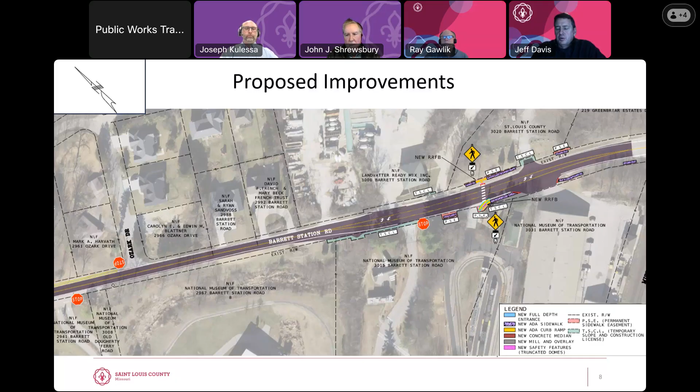The pavement resurfacing will then continue on the other side of the bridge in the eastern direction. Curb ramps will be installed at Trossock Lane to provide pedestrian access to the existing sidewalk.

As you can see from this slide, the pavement resurfacing continues east. The northern side will have drainage improvements. The existing head wall and crossroad culvert will be replaced to help resolve the drainage issues that have been reported by residents throughout this corridor.

The pavement resurfacing continues east, as well as drainage improvements. The approach to Barrett Crossing Court will be replaced due to poor conditions. The pavement resurfacing continues to Barrett Station Road and Big Bend Road, where signal improvements are proposed. The project resurfacing ends at Big Bend Road.

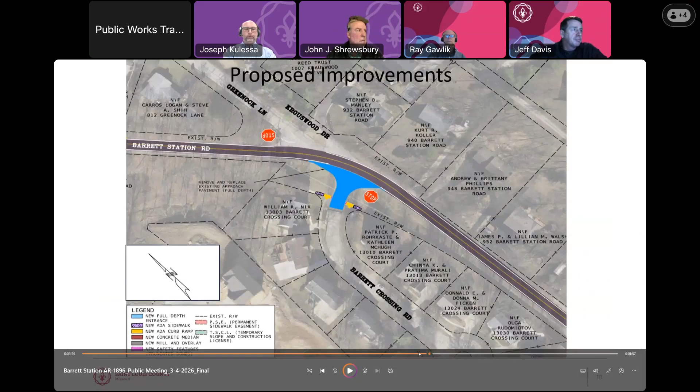John, I can speak to that if you'd like. Yes, please, certainly. I'm assuming you're talking about the turn there, kind of west of Ozark Drive towards Old Dougherty Ferry.

There's a known issue there with a power pole being very close to the edge of pavement. That's something our team's looking at, to see if we can potentially relocate it to a better spot so it doesn't get sideswiped. Also, we're planning wider outside pavement markings, like 6-inch wide pavement markings, just to make it easier to see where that pavement drop-off is. So those are two of the things we're doing on that turn.

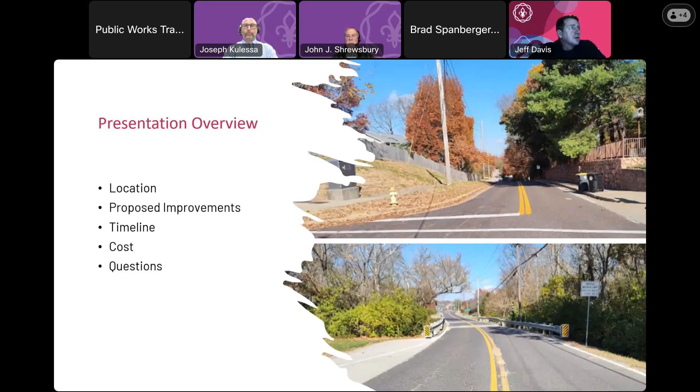Hello, and thank you for attending this meeting. We are happy to share information about St. Louis County's plans for improvements along Barrett Station Road. During this presentation, we will review the project location, the proposed improvements, project timeline, and the project budget. We will open the chat for questions after the presentation.

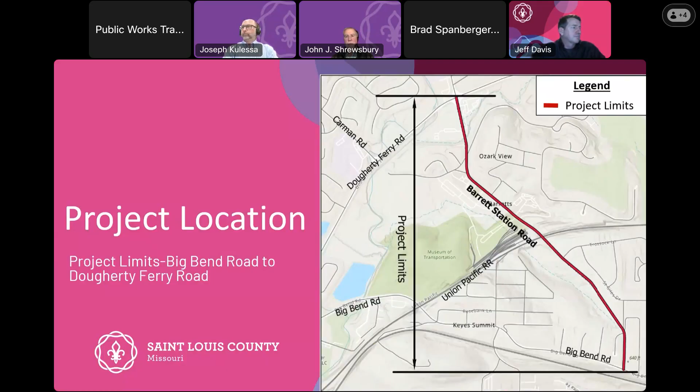This project is located along Barrett Station Road from Big Bend Road to Dougherty Ferry Road. The limits are shown here in red. The project improvements are approximately 1.2 miles in length.

Here's a look at the existing conditions. The top image shows the poor conditions of the pavement along Barrett Station Road. The images below show a drainage pipe in need of replacement, storm sewer needing debris cleaned up, and a traffic signal at Dougherty Ferry that's aging and needs upgrading.

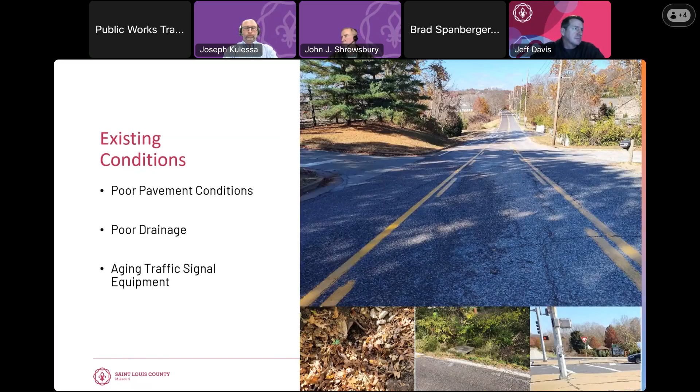The county's plan to improve this corridor includes repairs and resurfacing of the pavement, improvements to pedestrian crossings, and constructing ADA-compliant curb ramps. There will be traffic signal upgrades, including yellow arrows for left turn safety and roadside units for emergency services preemption and data collection.

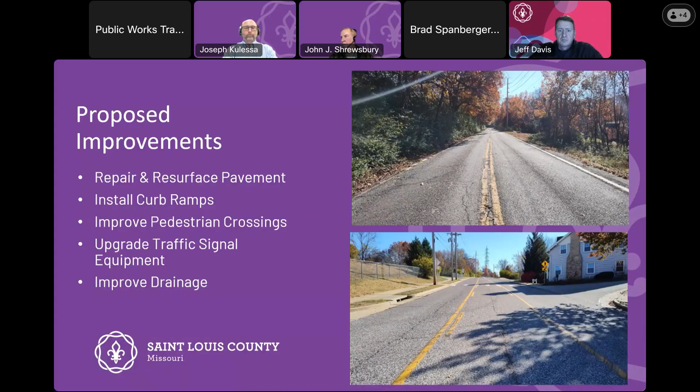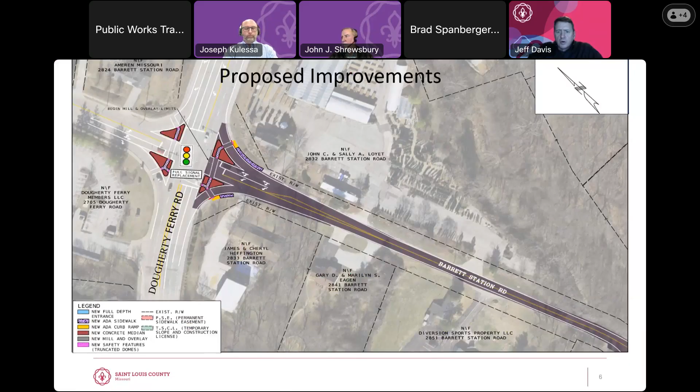This project will begin at Dougherty Ferry Road. Improvements will include signal replacements at the intersection, concrete median islands rebuilt with pedestrian cut-throughs, and partial sidewalk replacements. Through this section, the pavement resurfacing will continue to the southeast and introduce drainage improvements on the east side of the road at Old Dougherty Ferry Road and Barrett Station Road.

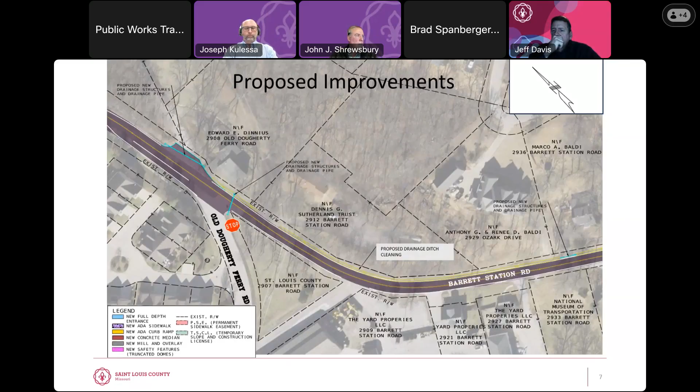The pavement resurfacing will continue until it reaches the bridge. To improve pedestrian crossings, new rectangular rapid flashing beacons, RRFBs, will be installed, as well as a new crosswalk and curb ramps to service the Transportation Museum. This will improve driver awareness and safety. Examples of RRFBs can be viewed on the county's website.

The shaded areas marked TSCL are temporary property rights that we're requesting from the property owners to construct the planned improvements. That portion of the land is still owned by the property owner. The shaded areas marked as PSE are permanent property rights. We request to continue to maintain the sidewalk improvements.

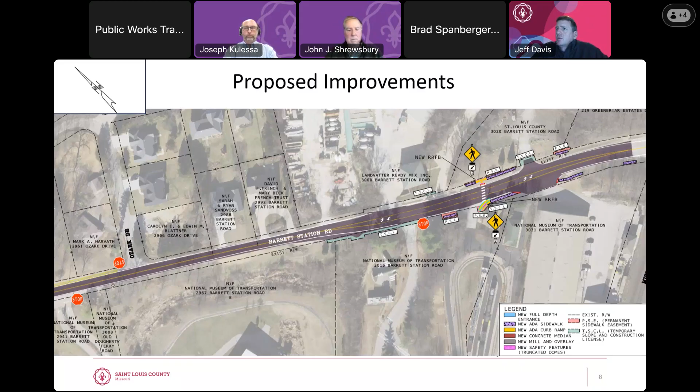The pavement resurfacing will then continue on the other side of the bridge in the eastern direction. Curb ramps will be installed at Trossock Lane to provide pedestrian access to the existing sidewalk.

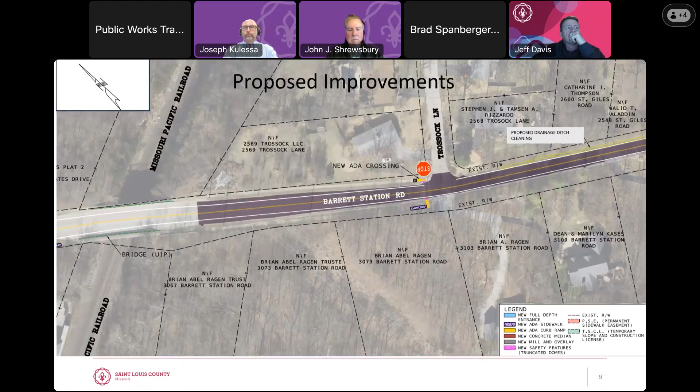As you can see from this slide, the pavement resurfacing continues east. The northern side will have drainage improvements. The existing head wall and crossroad culvert will be replaced to help resolve the drainage issues that have been reported by residents throughout this corridor.

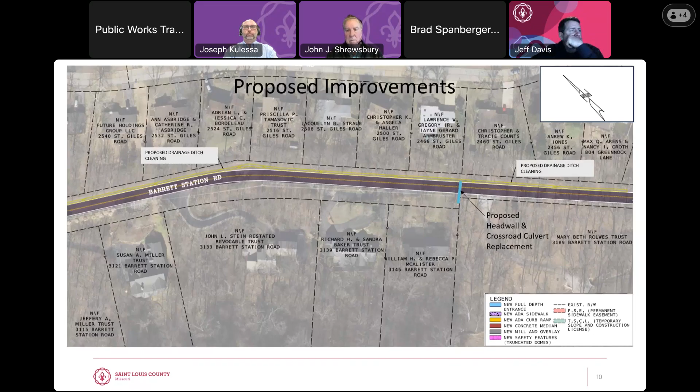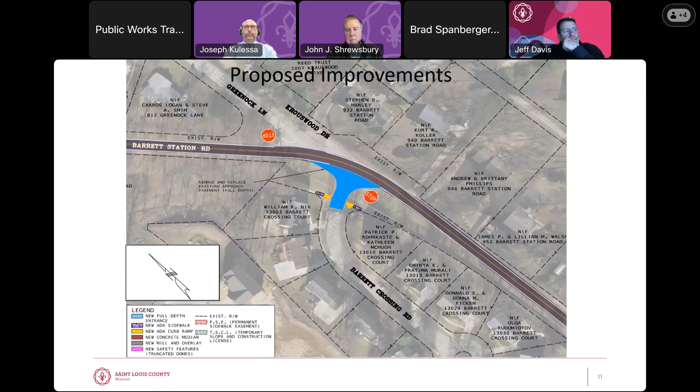The pavement resurfacing continues east, as well as drainage improvements. The approach to Barrett Crossing Court will be replaced due to poor conditions. The pavement resurfacing continues to Barrett Station Road and Big Bend Road, where signal improvements are proposed. The project resurfacing ends at Big Bend Road.

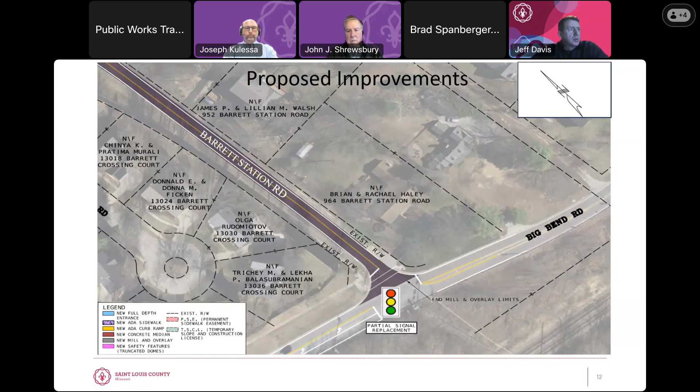And that concludes our presentation. Thank you so much for watching. At this time, we will address any questions or comments you have in the chat window. Thank you very much.